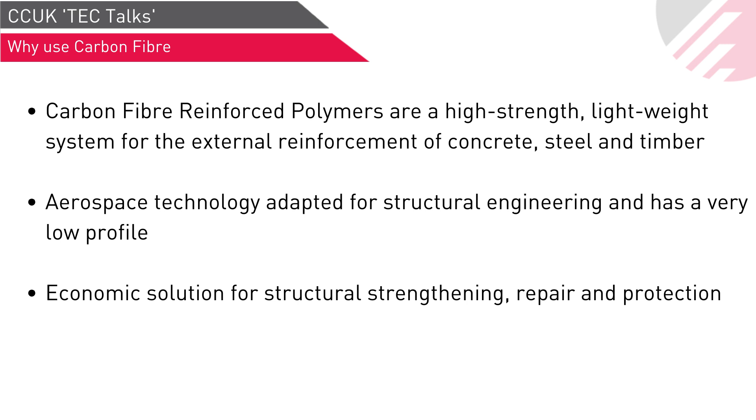Okay. So we're here to talk about the service risers and penetration side, because we're seeing a lot of this on building work now, where they've got to put in a lot of M&E works, yeah? Yes, so this is another type of strengthening which can easily be done using carbon fibre strengthening systems. This is quite a common requirement, especially when you're refurbishing an existing structure or changing the use of an existing structure. For example, a commercial building converted into a hotel, or maybe a school. They may have to have new openings through existing reinforced concrete elements.

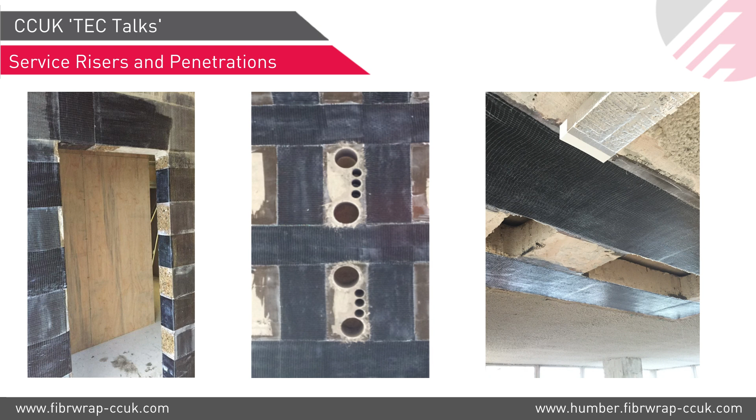But if there are bigger openings, as you could see in the leftmost or rightmost images, then in that instance we usually recommend the project engineer should do a finite element analysis and model this structure before and after, and then see the actual tensile stresses and design FRP for those stresses rather than working on force equivalency.

So we're going to look at the general design principles now for using carbon fibre in this area. Yeah, so as I said, there are two approaches we can take, as we have already discussed. One is based on force equivalency, where you design FRP based on the number of rebars you are going to cut in that opening. But if the openings are bigger, then technically it should be designed based on the forces generated after the opening is formed in an FE model or something. But again, once we know that force, how to design FRP for that force?

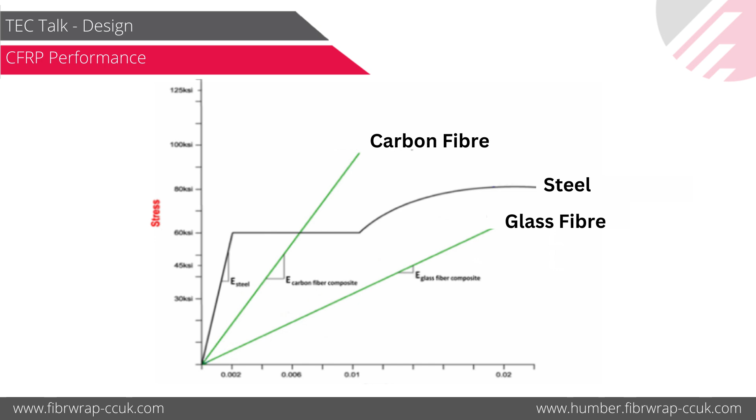So when you look at dry properties, and when you actually look into dry versus cured. So FRP is a composite material. So you have at least two materials mixed together to make FRP. You have a dry fiber that is mixed with an epoxy matrix. When it cures, it becomes a laminate. That laminate is called FRP.

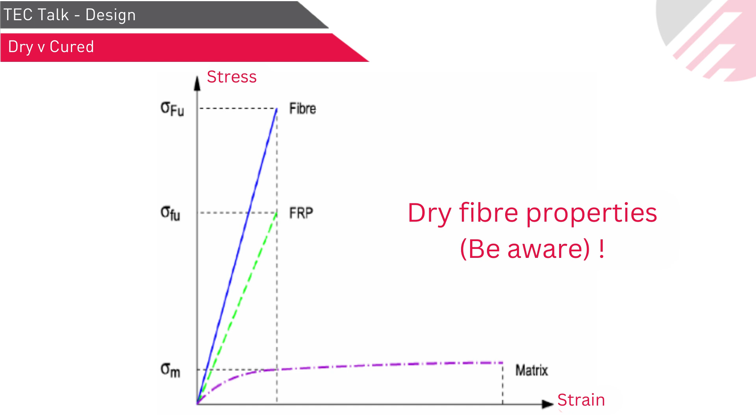So we're going to look at some project examples now. I think there's a project we did quite recently in Birmingham. So this is for service riser penetration through the beams, which is, again, as I said, quite common these days, especially when you are reusing, or as we call it, adaptive reuse of an existing structure.

So in this instance, they wanted to put new services through the floor plate, and the best place to put those services was through the beam, so that they could remain very close to the slab and they don't lose any headroom from the existing structure, because it was anyway not a very high headroom. It was hardly 3 meters from slab to slab. So that's why they decided to go through the beams. They needed new penetrations through the beam, and that's why the strengthening was required.

So the site conditions, obviously, weren't perfect weather in the winter, but we have to do various checks before we can apply carbon fibre. The carbon fibre is applied in certain environmental and climatic conditions. You need a minimum 4 degrees centigrade temperature to apply FRP. Humidity should be less than 85%. So as you said, in the winter months it's very difficult to get that kind of weather naturally. So you have to create an artificial environment and enclosure where you put the heaters on and raise the temperature if required.

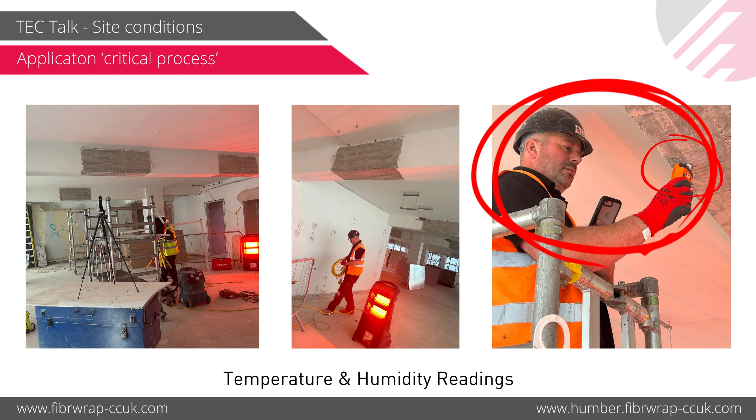So that's shown in the picture on the left and in the centre, where we're raising the temperature of the immediate area. And the picture on the far right, that's a quality control process, where they have to take the temperature readings before applying the carbon fibre, so that there is a record kept for every application of which environment it was applied in, so that it can be referred back to if required, and we can have full control over the application.

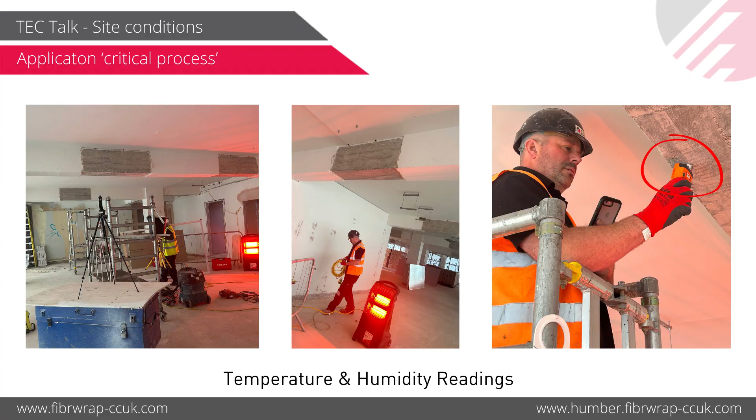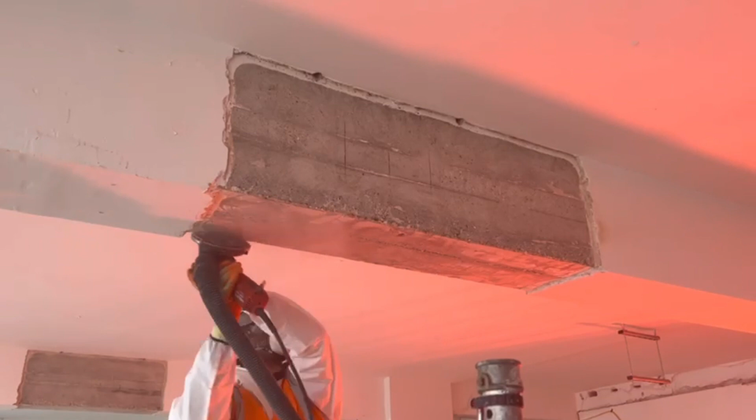So we're going to see the video of the application process itself, yeah? Yeah, so the first thing is surface preparation, which is done by diamond grinding. Usually the plaster was removed by the main contractor, then we drill holes for the carbon fibre anchors into the beam and slab junction so that we have continuity there. Then they grind the area and clean the area, so it needs to be dust free. And once that's been done, they can continue with the application.

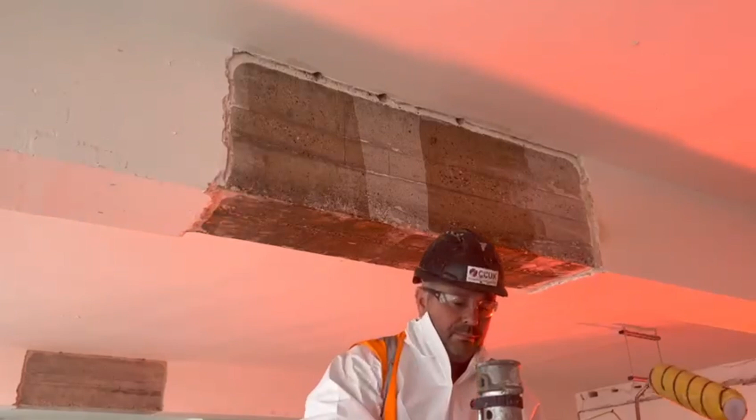So before doing the application, they will take the temperature readings again to make sure that the temperature is still as it needs to be after putting the heating there in this particular instance. After that, they'll do priming, which is done using pure epoxy, so it can soak into the concrete. Then they provide the first coat of thickened epoxy, which is the white colour epoxy we are seeing. Once that coat is applied, they will unroll the first layer of carbon fibre, which is saturated on site in a different area. So when they are applying it, it's in wet condition.

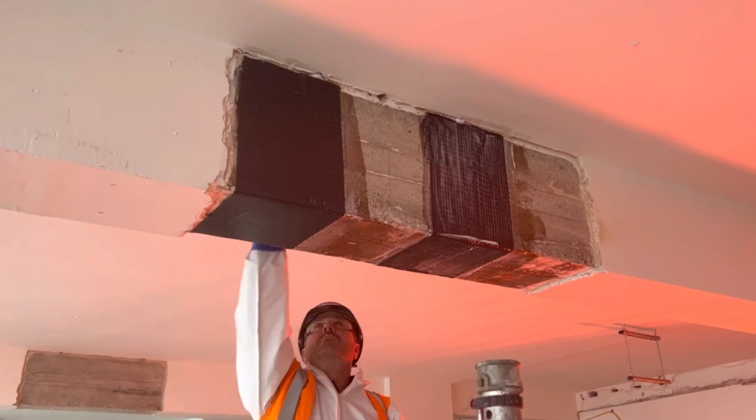When they've applied the first layer, they will apply the second coat of epoxy, followed by, if there is any anchor installation, putting the anchors in, otherwise the next layer of carbon fibre. But in this instance, because it's shear strengthening, we use carbon fibre anchors so that we have full detailing there, like a closed loop. So that's why the anchors were installed. They'll put the anchor into the drilled hole, which is filled with epoxy. Then they splay the anchor onto the already laid layer, and then put another layer.

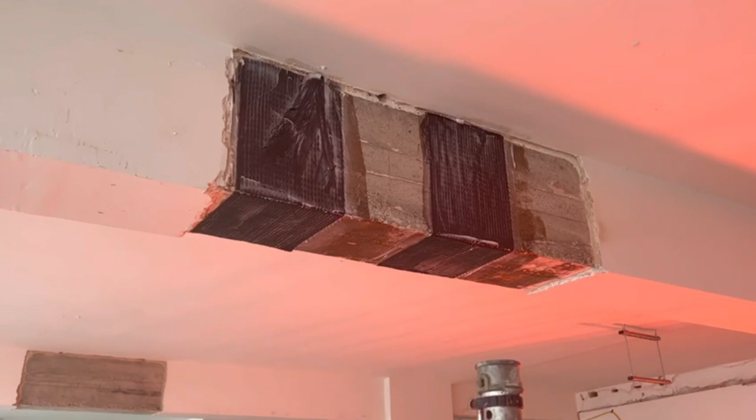So the anchor will be sandwiched between two layers, or if it is a multiple layer application, it will be put in just before the last layer. So it will always be sandwiched between the layers. Once that's done, they apply the final coat of epoxy and take out any air bubbles. So that's how ultimately the application is done. But again, as I said, it's saturated prior to application, so the application is called the wet layup method.

So once the process is complete, how long is it before the contractor can come back and actually core drill the beam? Yeah, so in ambient conditions, the FRP will be 100% cured in 72 hours. So they can come back in 3 to 4 days' time and core this opening.

The reason for doing this strengthening prior to coring is that right now there is no damage to the existing reinforcement and everything, so FRP could remain as it is. But as soon as they core it and cut a rebar, the FRP will be stressed, so that any additional stresses will go into the FRP, so that you utilize the FRP completely in that way.

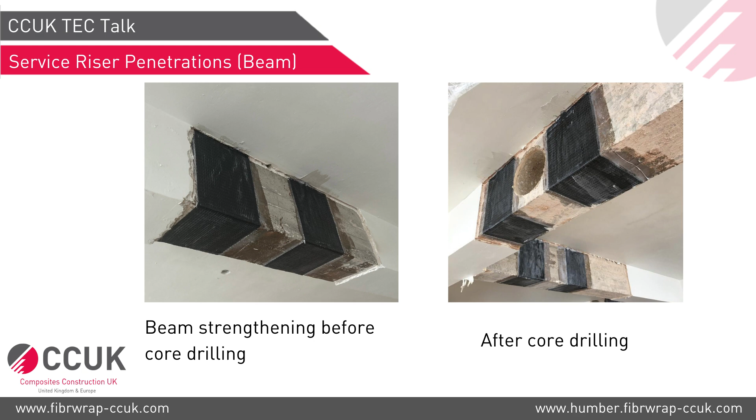So when we've finally done the test, as part of our QA/QC procedures, we have two tests that we look at. Yeah, so because it's a bond critical application where we are relying on bond between FRP and concrete, we do a pull-off test, which is the test all the project engineers should ask the contractor to do if there is a bond critical application, which could be a beam strengthening, slab strengthening, wall strengthening.

So in the bond test, all we want to make sure is that FRP is bonded correctly onto the substrate, which shows that the preparation was correct, the saturation was correct, the installation was correct. So the difference between this pull-off test, which we do for FRP strengthening, and the standard concrete pull-off test is that in the concrete test we look out for a number in terms of pull-out strength, whether it's 2 MPa, 3 MPa, depending on grade of concrete. But in the FRP pull-off test, we are more interested in mode of failure.

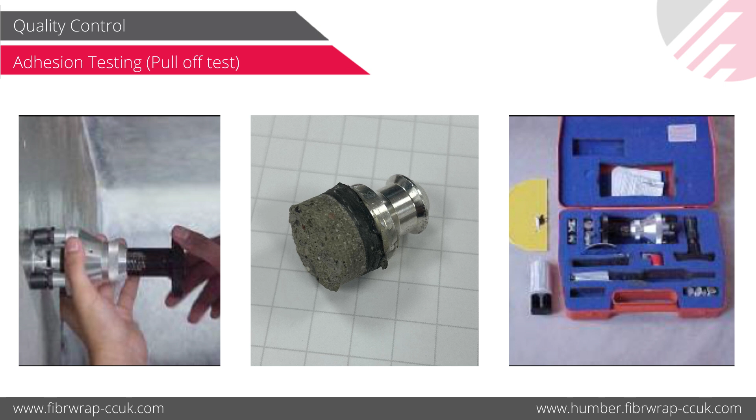Those tensile properties should match with the data sheet of the material or should match with the design values which you've used in your design. So that's the pass criteria. It will tell you what sort of material has been applied onto the structure, and that's why I say that in the design we should always consider the final cured laminate property, because you can directly compare these test results with your design values. And for quality assurance purposes, the test plates are kept on site in our works?

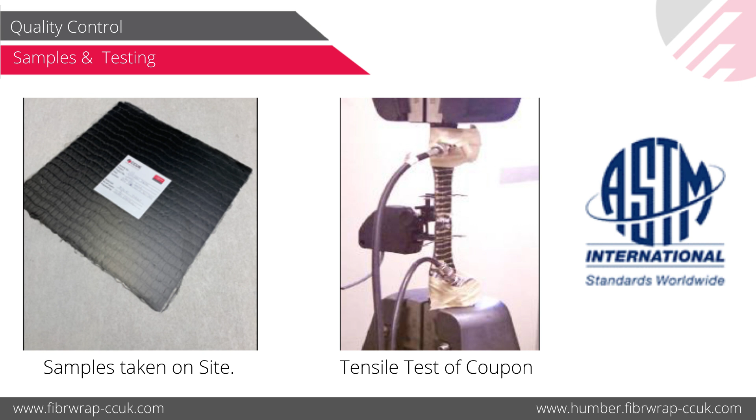Yeah, they will be left on site to cure, but once they are cured, we'll keep them in our record, and if required, the client can have a sample as well for their future reference if needed. Okay.